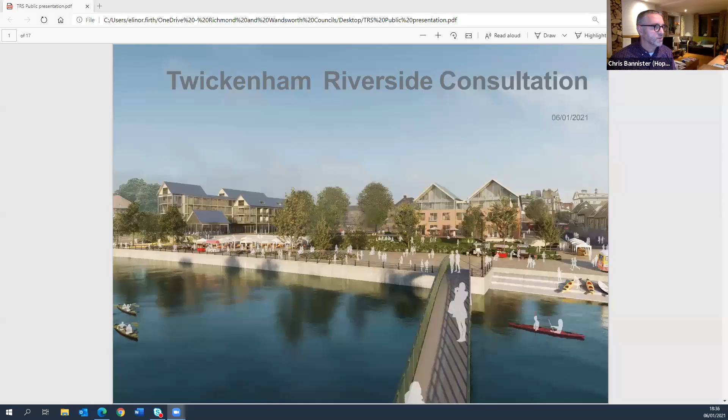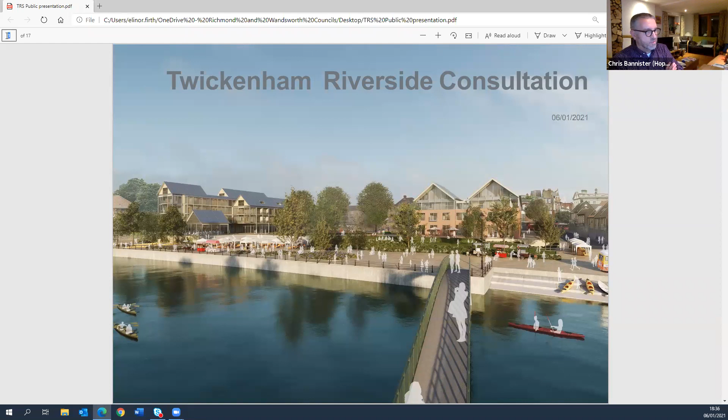Okay, thank you very much. In fact, if you advance two slides, because I think there was a slide put in... if you go on to the next slide and then the next one.

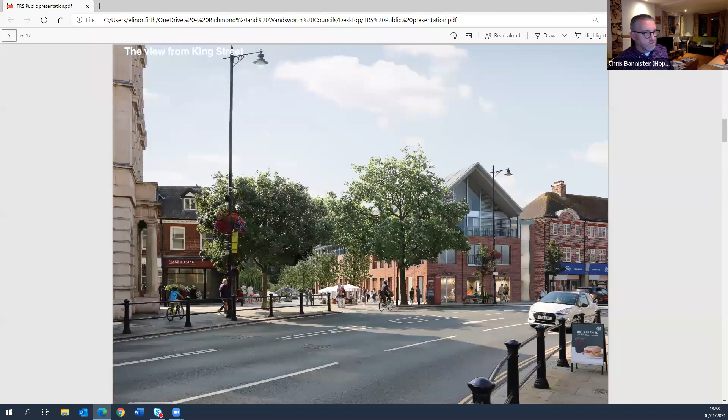This is a view from the London Road to King Street junction, looking down towards the river. The new Water Lane building replaces the existing Santander building on the corner, and in line with comments made at a previous consultation event, it's been slimmed down from earlier versions to create a much wider pavement that will enable the feel of Church Street to be continued down to the river edge, with opportunity for market stalls and tables and chairs to be set out on the pavement. The widened street also opens up a view of the Eel Pie Island bridge, creating a greater connection with the river.

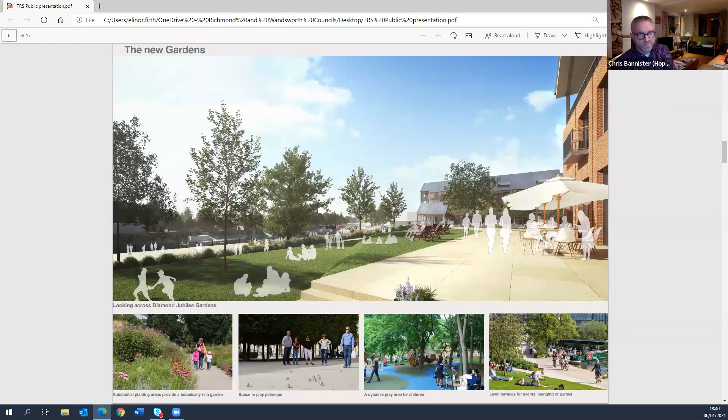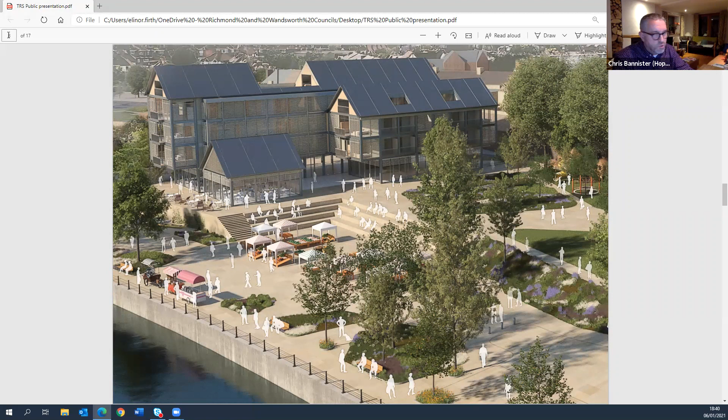This is an aerial view looking down on that central activity space, where the tiered seating has been arranged on two sides of the event area to create an informal amphitheatre where people can sit and look down on the activity below.

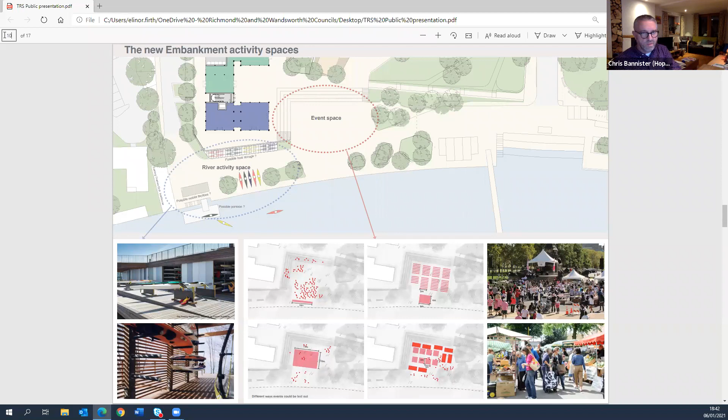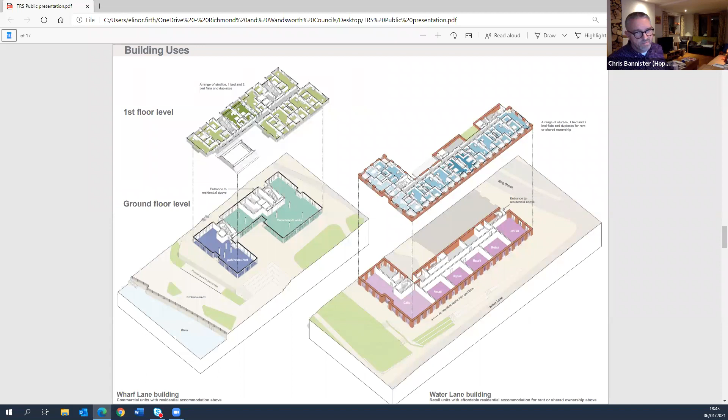Architecturally, the aim for the two buildings is for them to be related so that they work together to create a sense of place, but also that they express their own individuality. They're both composed of simple pitch-roofed elements that are brought together in different ways.

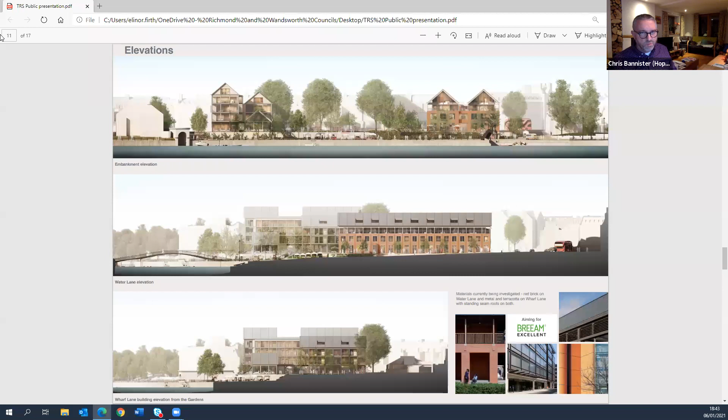The Wharf Lane building is the more complex of the two and consists of 3 different heights that help break up the skyline, whilst at the same time giving a degree of identity to separate elements like the pub that you can see in the foreground on the left-hand side. In terms of materials and appearance, we are looking at using more of a frame type structure that picks up the language of the nearby boathouses and relates the building to the river.

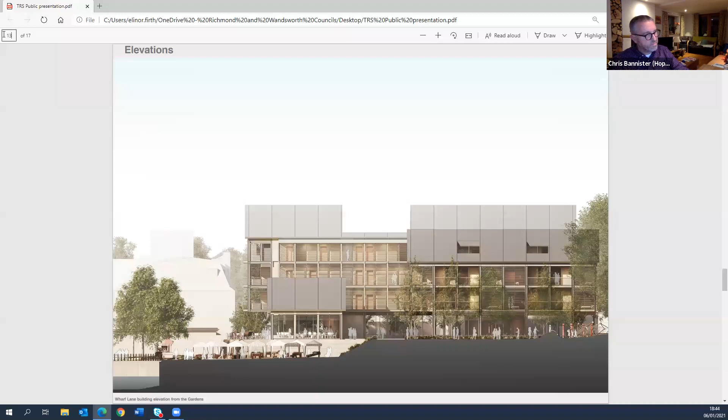Water Lane, on the other hand, is a much simpler building that is 3 stories in height and built out of brick to help it relate to the other brick buildings on the town centre.

In terms of vehicle movement, both Water Lane and Wharf Lane will be open to 2-way traffic, but due to the removal of the car parking from the embankments, they will see a reduction in the overall volume of traffic using them. Water Lane will provide access to a number of dedicated service bays for Eel Pie Island adjacent to the bridge.

Due to the width of Wharf Lane, there will be some restrictions on larger vehicles turning left into Wharf Lane from King Street. In order to get around this, it is proposed to allow a limited number of vehicles affected to go down Water Lane and cross over the embankment. This access will be restricted and limited to certain hours of the day to minimise its impact on the use of the embankment for other things. And that's represented on that diagram by the dotted line that you can see there.

In terms of pedestrian movement, the aim has been to make the gardens as accessible as possible. The green routes represent the accessible routes across the site that do not require the use of steps. Due to level differences, it's not possible to avoid steps entirely, and the red routes indicate those routes that require the use of steps, but we've tried to keep them to an absolute minimum.

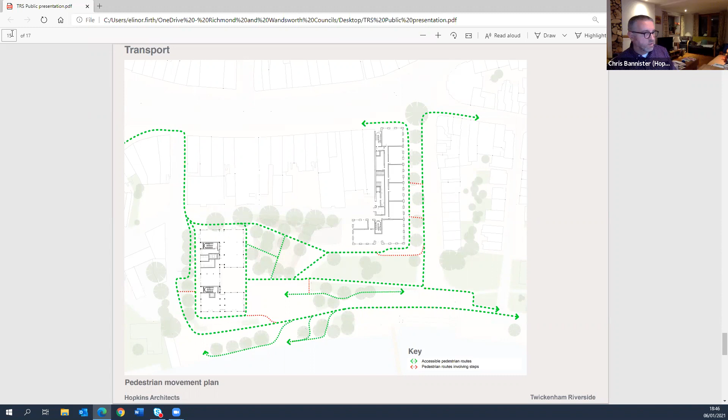In terms of cycle routes, there are a number of cycle routes across the site and cycle parking areas provided at strategic locations around the site.

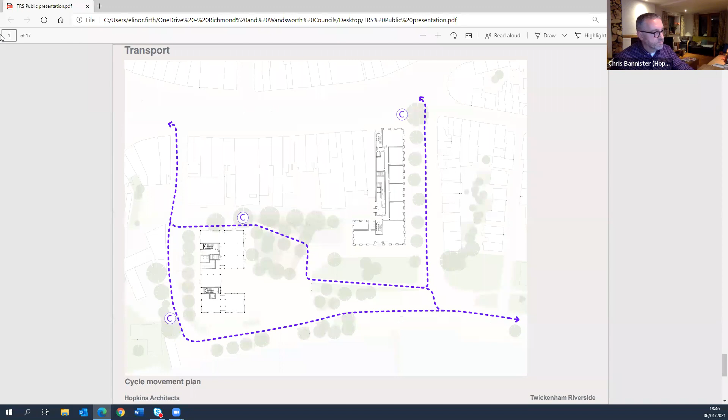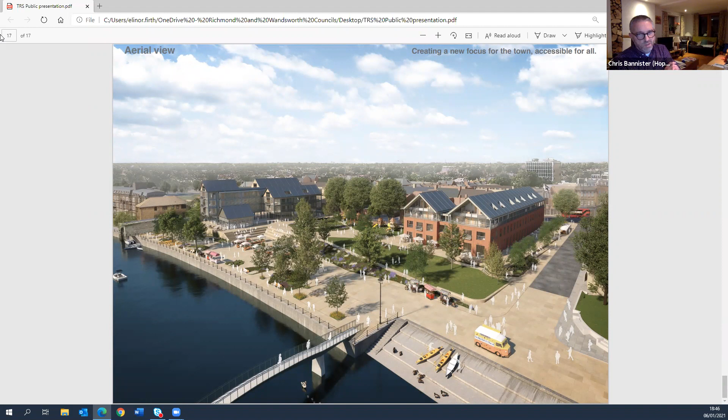And finally, to end this presentation, this is an aerial view of the scheme that shows how it all comes together to create what will hopefully become a vibrant and exciting new destination for the residents of Twickenham and beyond.

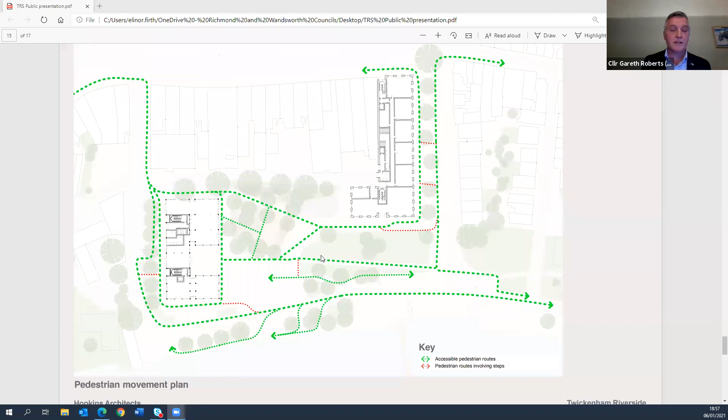I think we're right in saying that no parking permits are going to be given to the flats. So people will be buying these flats in the knowledge that if they want to park a car, they're going to have to go some considerable distance to find a non-resident bay. So we are trying to minimize the number of cars generated by this development.

We can't, it's absolutely impossible unless you were to have a borough-wide CPZ, to prevent it entirely. But we are of the opinion that people who come to buy or rent these flats will not be reliant upon the car because of the very good public transport links. We are trying as much as possible to ensure this is a riverside accessible for all.

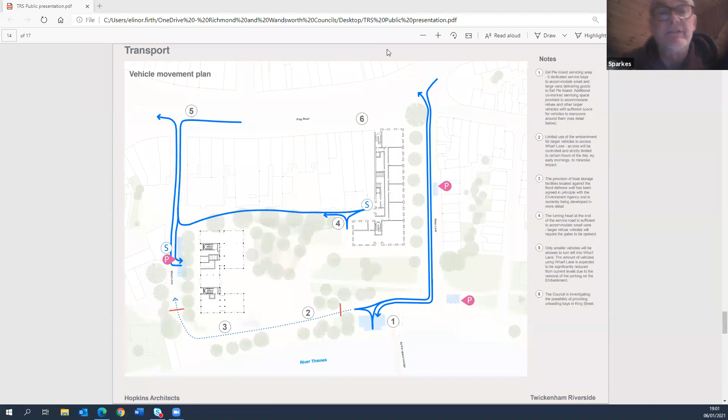Can we just, I think we should respond to that. Nick O'Donnell from our transport team is here, and we've done a lot of work on the parking strategy. I don't agree with that point, but Mr. O'Donnell is my lead for parking matters, and he's going to make some comments now.

Thanks, Gareth. I don't want to get into too much detail, but to clarify one important point: the parking being removed is not all going back into the car parks. We're looking at a number of factors. One is that the current parking is very underutilized and misrepresented in places, so you have a lot of redundant car parking space that doesn't get used much. It's about reallocation, redistribution, reuse of some existing car parking spaces on the site, plus re-provision of spaces within immediate proximity of the site.

So nearer than where the car parks are, there is the ability to put in and provide permits and spaces for users. That includes disabled bays, and disabled badge holders can park within reasonable extents pretty much anywhere across the site in relation to yellow lines, etc. They have that dispensation naturally. So there is plenty of ability for people to come to the site and park within close proximity.

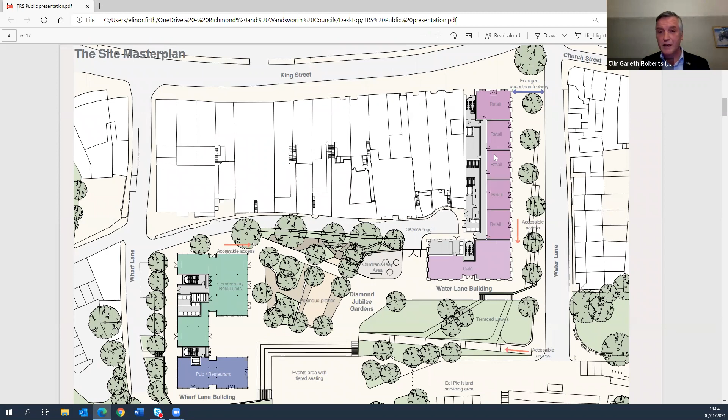So if you can see right in the center, plumb in the middle, is the Diamond Jubilee Gardens. You can see a children's play area, the petanque pitches, terraced lawns, various trees and what have you. We are in current discussions with the Twickenham Riverside Trust, who run the Diamond Jubilee Gardens, to ensure they're satisfied with the provision made, and they're looking to see whether we might be able to arrange to use the lower tiering area as well. So the Diamond Jubilee Gardens now sits right in the heart of this, as opposed to being slightly to the side. This is going to be, I think, a much enhanced Diamond Jubilee Gardens for the residents, which is again something people have been asking for as part of the consultation process.

So the area of the Jubilee Gardens is not compromised then? No. One of the red lines we had with the Twickenham Riverside Trust was to ensure we were matching, if not providing more space than they currently have, and this has been achieved within this new design.

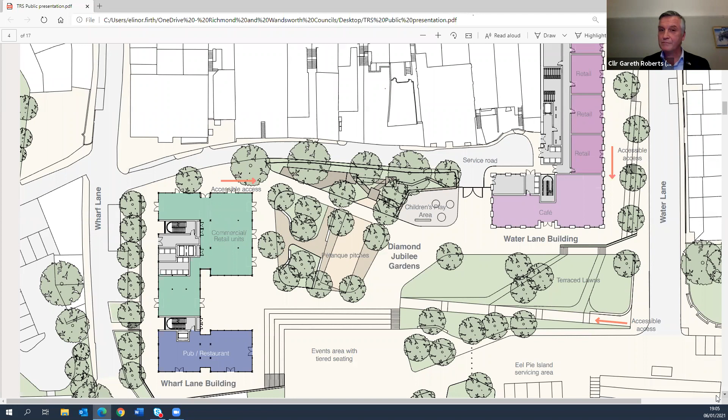Okay, so you're about to move into the developed design. Who's project managing this project? Gareth, we've met before, haven't we? I'm Paul Chadwick, I'm the Director of Environment. I'm what's called the Senior Responsible Officer, so I think that's me. Your term is me. Okay.

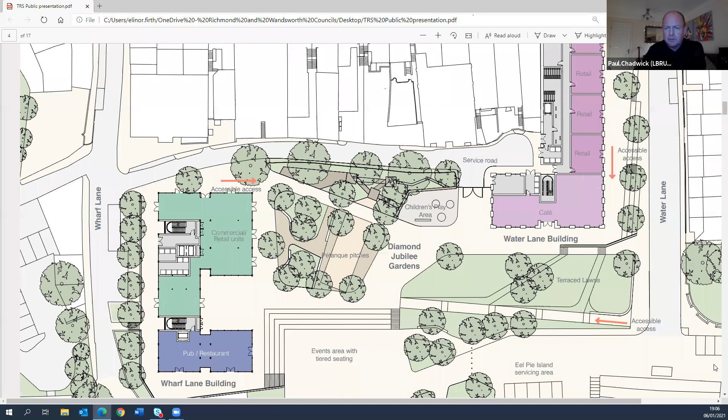Can I just add, Gareth? I think we can be very clear that the Diamond Jubilee Gardens and the agreement with the trust will extend the Diamond Jubilee Gardens forward from what's shown there into that events area between the gardens and the river. So much of the embankment will be part of the Diamond Jubilee Gardens Trust holding. That's the intent. Thank you.

Okay, thank you very much for your questions. We now move on to Steve Morrell, who wishes to ask a question regarding the cycle lane strategy and how this will link into much needed plans for safe cycling through the town centre for families and children.

Hi, can you hear me? I've been muted and unmuted.

Good. Well, first of all, I'm really pleased to see what's being proposed. I think it's very difficult to find the right balance, and I think this looks really quite exciting. My question is almost more of a plea than a question about detail. It's just making sure, from a cycling and pedestrian point of view—we've talked about access already, and we don't want cars going there. We want to make it somewhere people are comfortable getting to by other, more green means of transport. So just make sure when we're thinking about cycling in particular that we think about infrastructure that not just protects cyclists—I'm not trying to just talk about the bikes—but also particularly pedestrians, so that we don't end up with something that's confusing and mixed up.

That means pedestrians get worried by cycles, cycles get worried by bikes. Perhaps the bigger question, which I accept is outside the scope of this particular planning, but I really hope that we can somehow link what cycling routes we build into this scheme into much safer cycling in the main parts of the centre of Twickenham as well. Because if we can make safer cycling through the town, I think it's much more likely that people will be comfortable to cycle with their families to this type of venue. So it's less of a question and more of a plea.

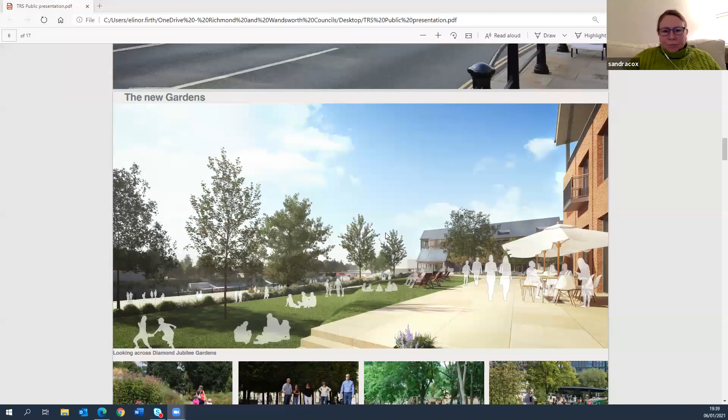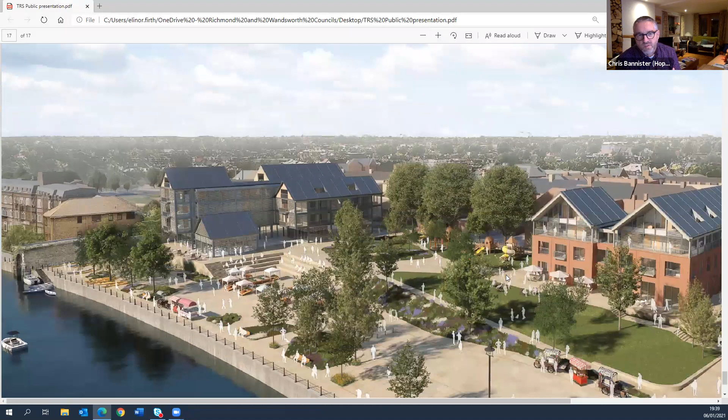Right, okay. I think if we can go to the last image, you can see it there maybe a bit better - the aerial shot at the end. I'm not sure you can zoom in, but you can sort of see the terracing there, and it also relates to the steps that go up the side. Where the banks are is where the steps are, coming up from Water Lane along the front of the cafe, so you can see the steps - it looks like the banks come off from that. So the flat level relates to the level bit of paving in between. Right, got you, okay, I can see that a bit better now.

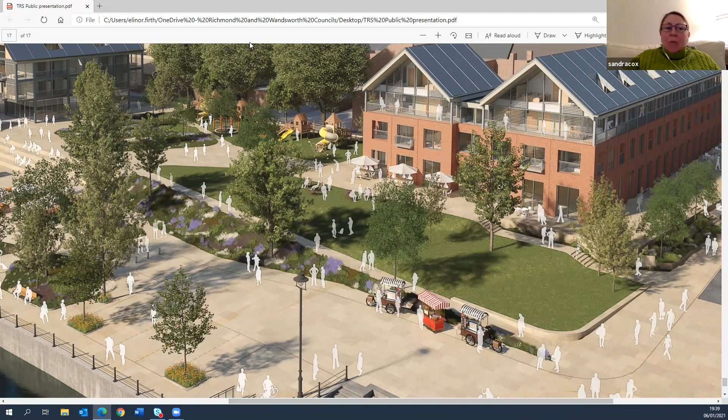Thank you. I just wanted to say that overall - I've lived in Twickenham for just over 20 years now, and I've seen so many different designs, and this is the first one that I actually like. I think it's really good. Thank you very much for that - it's really much appreciated, so thank you.

And we're going to move on to Katie Lee, who has a question regarding design for sharing space - walking, scooting, cycling - not necessarily all at the same time for the same person, but...

Thank you. I am not going to ask my original question - you have answered it through a previous question - but it was to reiterate that the ability to cycle and walk within a shared space is often taken away at a last moment due to not considering that detail design at the concept stage. So that was really more of a design point, not something that has to be thought about now.

My second question was actually about phasing - you've also answered that question. And my third thing was that, in fact, I am actually a council officer for London Borough of Camden, working in the Transport and Urban Realm area. So I'm partly viewing this to see how your consultation process is going and the use of Zoom to present and have a Q&A session. So well done, and I will be taking this feedback back to my council. I want to find out how you as a council are finding this useful, and also the participants as well.

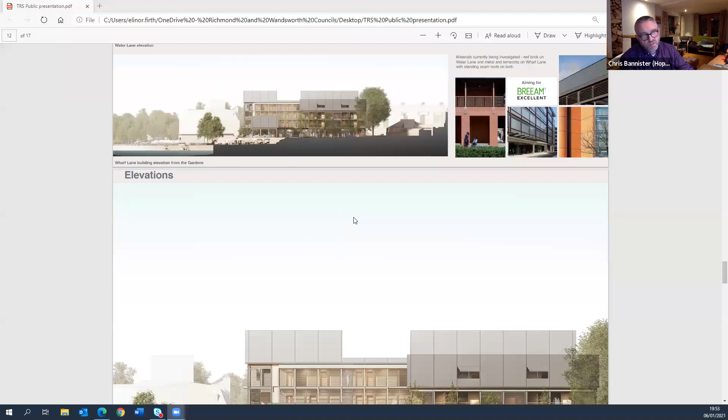Okay, can we bring up the slides please, and if Chris can be standing by to give us a brief overview. The proposal is that at the southeastern end of the Wharf Lane building, that dark blue area.

Sorry, carry on. So the dark blue rectangle you can see at the bottom of the Wharf Lane building on the left-hand side, that is the pub restaurant space that's been designated. Underneath that, in the basement area, there will be a kitchen space linked to it. And there's then commercial retail spaces to the north of that, the green areas.

We're not being specific about what those are at the moment. They could potentially be subject to planning issues and used for other functions. In theory the purple retail units on the right-hand side could also be, depending on any planning restrictions on use. But at the moment we're not being particularly specific about things.

What we have said is the pub restaurant at the southern end of Wharf Lane looks like a good idea, as would a cafe at the southern end of the Water Lane building. The only thing I'd add is that every time Chris says pub stroke restaurant, I have to say I kind of more think restaurant probably - I know there are different views on that, but I kind of reckon it would more likely be a good restaurant.

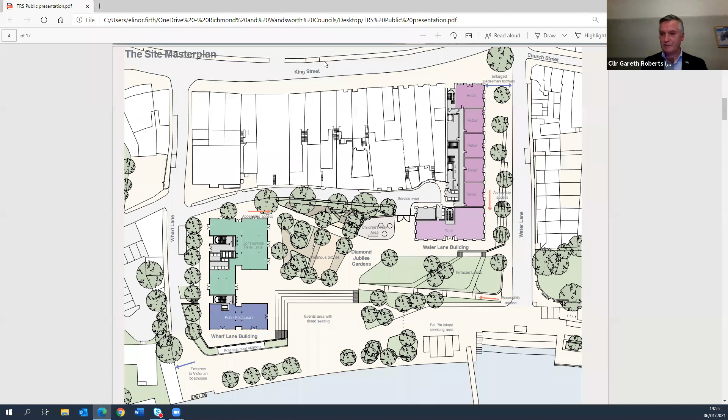In terms of retailers, yes, we would love to have independent retailers there, of course. It's not to say there is no place at all for chains, and we will be sensitive as to the retail use that we make of these spaces. Thank you, I'm keen to move on.

Ramachandra had a question about transportation in more detail. Well, thank you very much. I think as the discussion progressed, I got more and more clear about the transportation scheme.

But is there a possibility to actually see this presentation separately? Is it somewhere publicly available? Yes, it's going to be on the council website, and you can browse to your heart's content. If you're doing it on a tablet, then you can zoom and make it go. In that case, I'll do that separately.

I have a small second point, just a comment really, along the Water Lane, the proposed building facade. Generally the architecture is, I think, very in keeping with the scale and nature of the whole Twickenham Riverside development, the existing buildings, etc. But that particular facade, I find it has a very long stretch, and it's slightly monotonous, and as it is the gateway for visitors and the beginning of the journey, with a lot of commercial units there, probably that facade could be slightly more animated without undermining the overall concept approach, because across the road, the existing residential buildings also have quite a variety of architecture there.